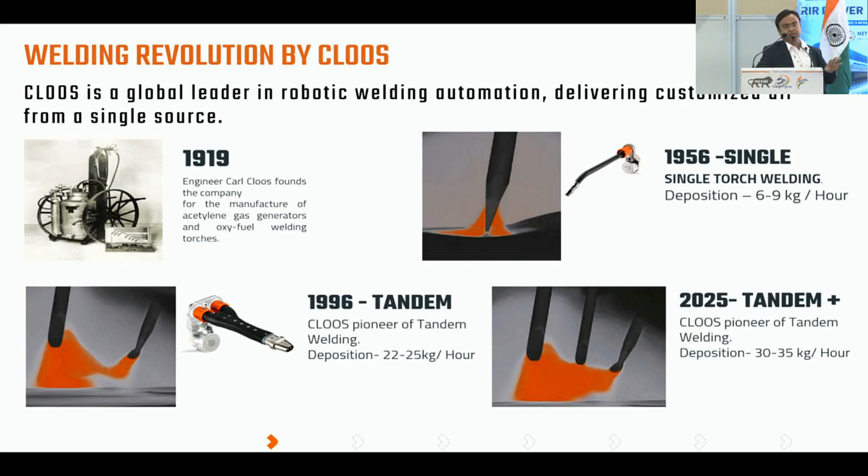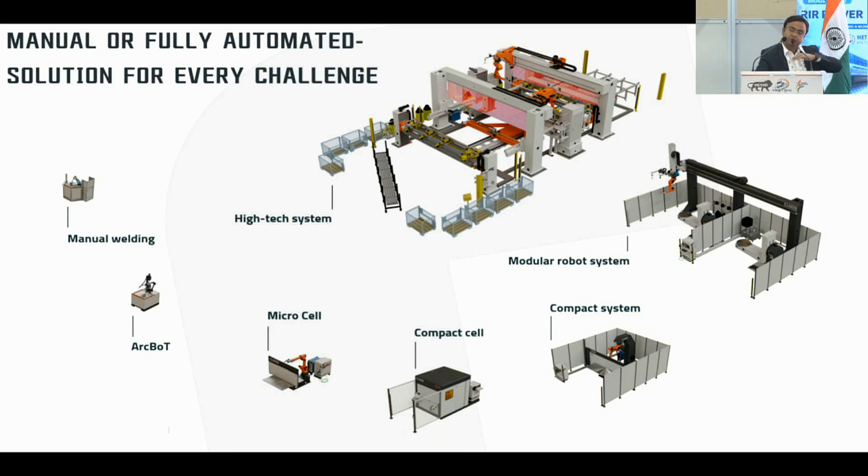Then I will come to the next stage, that is the welding automation we are providing to the industry - manual welding to small cell, cobot welding, or customized system. We are here just opposite this conference area. Once after this you can come, we can also share our experiences related to compact systems and other applications where we are developing the complete automation according to the product requirement or design.

We are supplying two systems for railway bogie side frame welding to BEML. We supplied to Apex Auto, Jamshedpur. Texmaco, we already supplied a small startup system, you can say. We are discussing for the next level of automation and welding development.

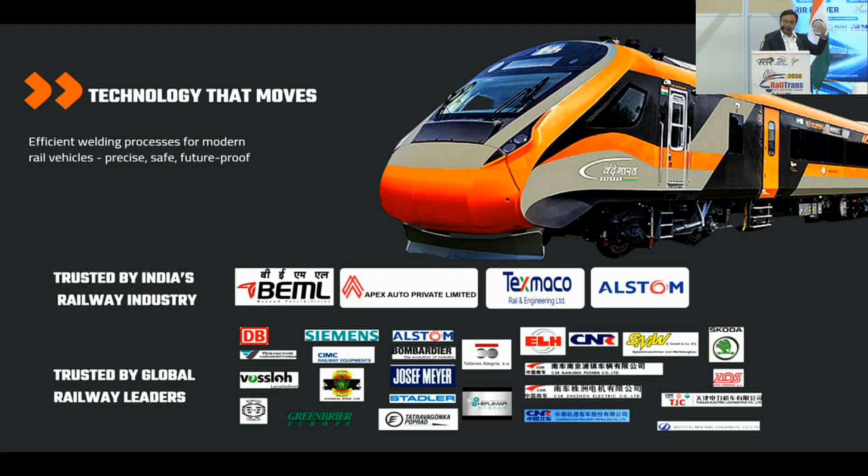This is how we started our journey in India, and we are really very excited that, due to the reason we are coming from the welding background, we have entire knowledge of all the innovation that happened all over the world for the last 30-40 years. We lead the manufacturing in China, so why not in India?

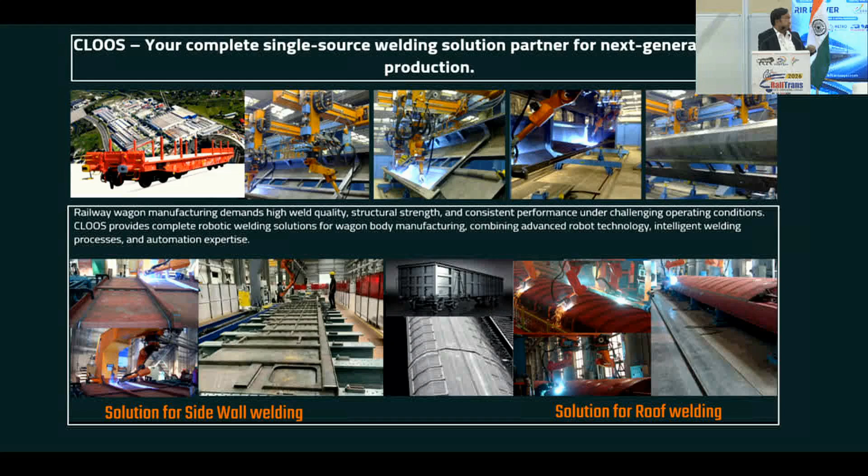There are different applications, either it's bogie side frame, or roof, or the coach body. We have a solution for everything, and these are all from a single source.

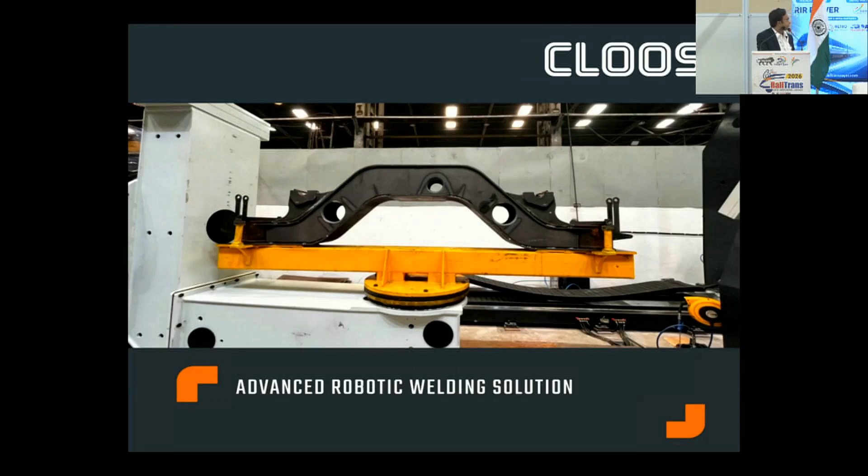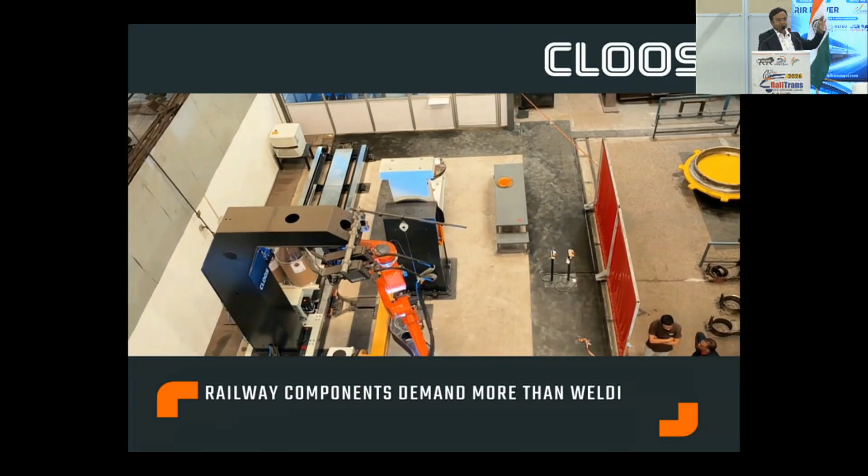So there is a small video. This video will show you some clips of the system we supplied already in India. This is for bogie side frame welding. We supplied this - it's a very new system, just one month old, supplied to Apex Auto Jamshedpur.

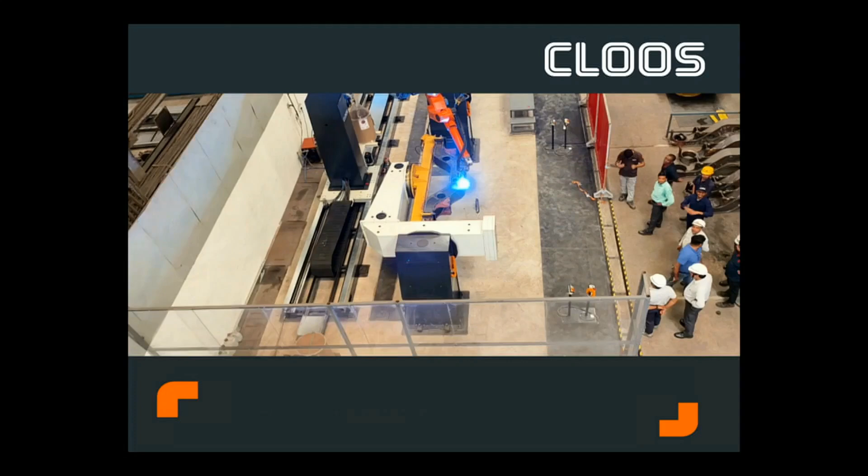Tandem welding technology, having very high deposition and very fast speed. So high productivity, almost zero distortion. Clean welding, no spatter cleaning or post-welding activity required. We can go directly for painting.

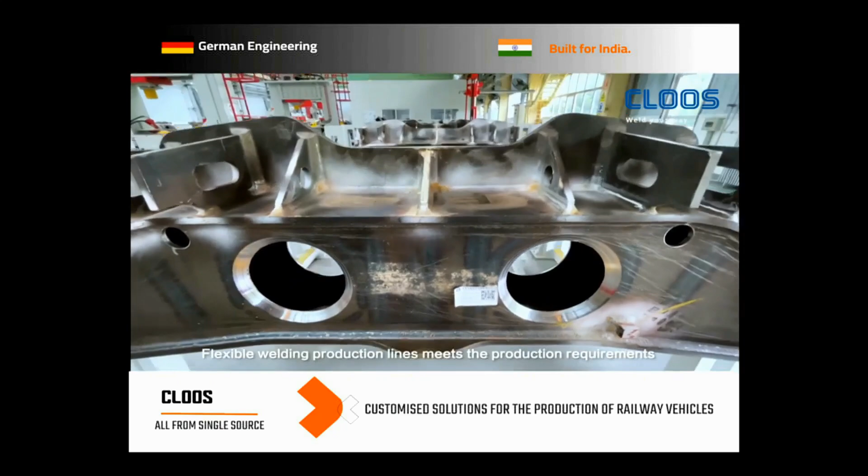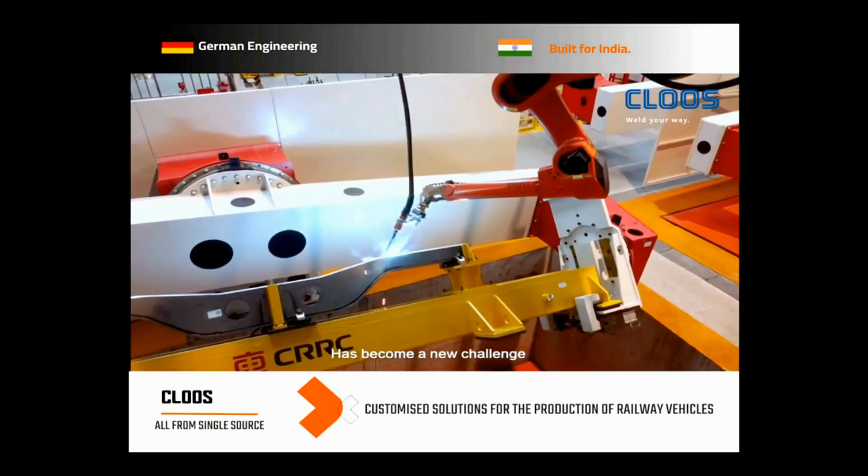So the scale we are looking for over the next 10 years in India, it's not only 1 or 2 automation, we need line automation to achieve that speed. This is a complete welding line for different components, bogie side frame.

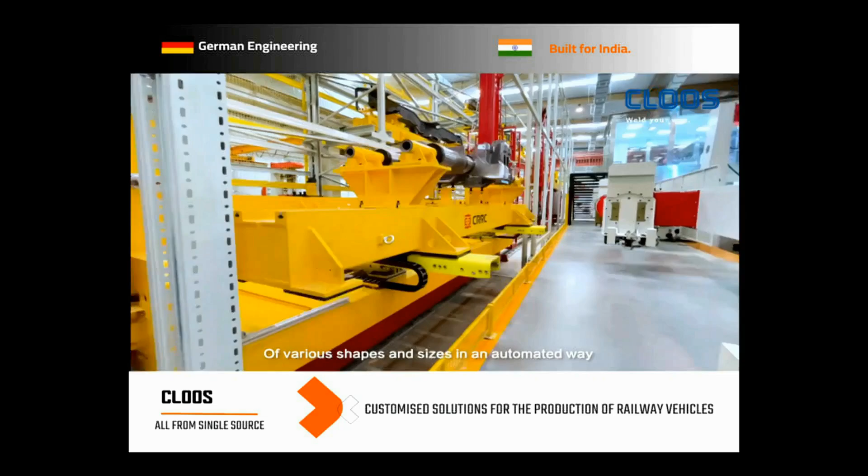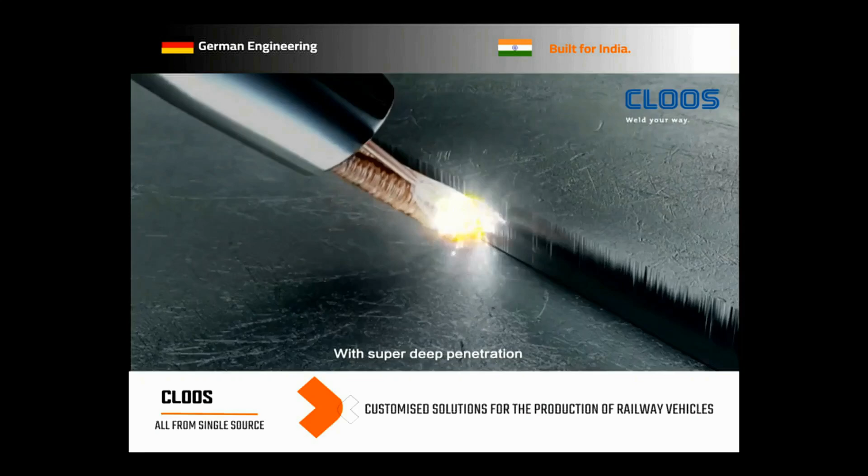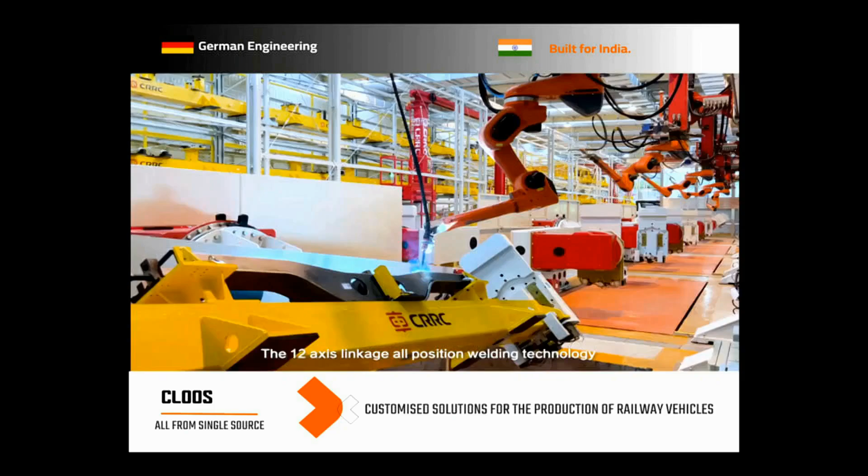Every welding is guided by a tracking system so that any component variation in input quality is automatically taken care of. So there will be no post-welding requirement due to errors happening on the shop floor. The system is AI developed so that any variation on the shop floor is automatically taken care of.

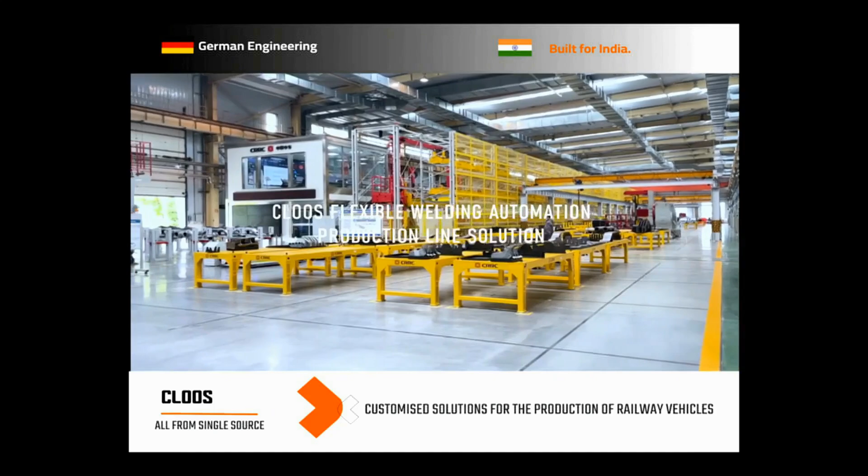The next part, according to our way of thinking, is that it's German technology. Being 20 years in the organization, I know there are many questions from customers about the support system in India, about the cost. This is a very genuine question which I want to discuss, also in a very short time.

So what have we developed? We developed a skill center in Pune where every welding technology which we are showing here, we'd like to invite from this forum, we can arrange a technical session where we can show live welding quality tracking systems, what we are showing in the video, and whether it is really applicable in Indian conditions. We have already developed this. So after this forum, we can discuss separately, we are ready to arrange a technical session at our Pune Experience Center where we can really show it.

Next is the cost. So what we have done, our first experience in a different sector, was at Garden Reach Shipyard. This is also one of the fast and successful systems in the Navy or shipyard, supplied by Cloos.

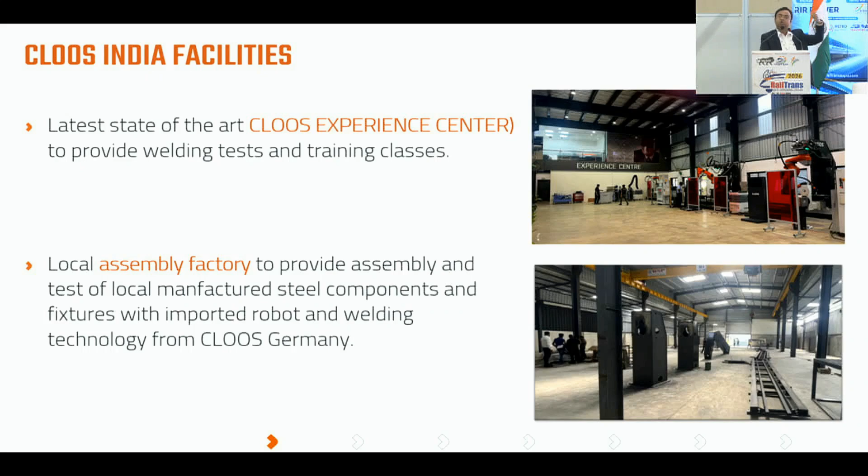Besides that, we have all private sector customers, we are catering to them for the last 30 years — you name it, JCB, Caterpillar, Case New Holland, all heavy machinery makers are our customers.